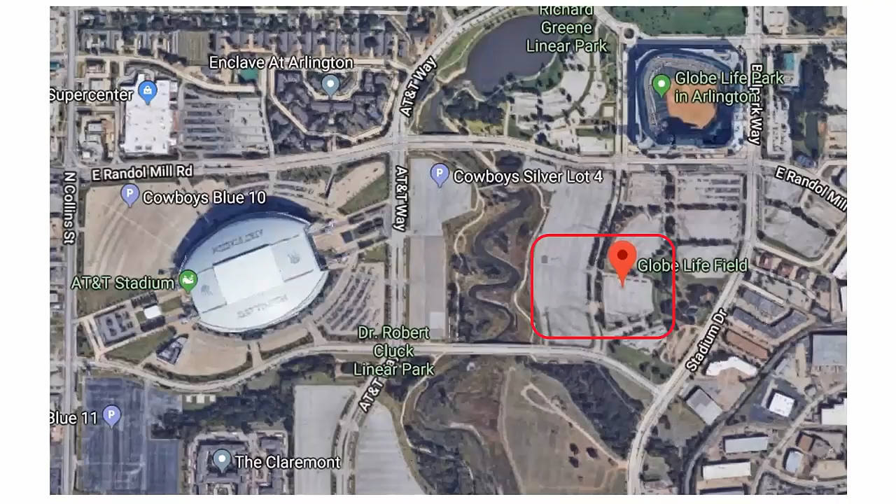Some Globe Life Field metrics. This is a $1.2 billion stadium. It's 1.8 million square feet, which does make it the largest in Major League Baseball. It's on a 13-acre site. It has 43,000 seats, and it is scheduled to open hopefully in July of 2020, albeit without baseball fans present. It has about 90 suites, 10 loge suites, and 13 field level boxes to give various premium offers and various vantage points for those premium areas.

For the project team, this is a joint venture between the Texas Rangers and the City of Arlington. HKS was the architect. Manhattan was the contractor, who will also be presenting some items related to the stadium. And Walter P. Moore was the structural engineer of record. To further go down into the design team, under HKS were 4 associate architects, VLK, VAI, SDS, and EGS. Walter P. Moore is the structural engineer, ME as the MEP engineer, WJHW as the technology consultant, MMA as the civil engineer, Land Tech as the geotechnical engineer, and SWA was the landscape architect.

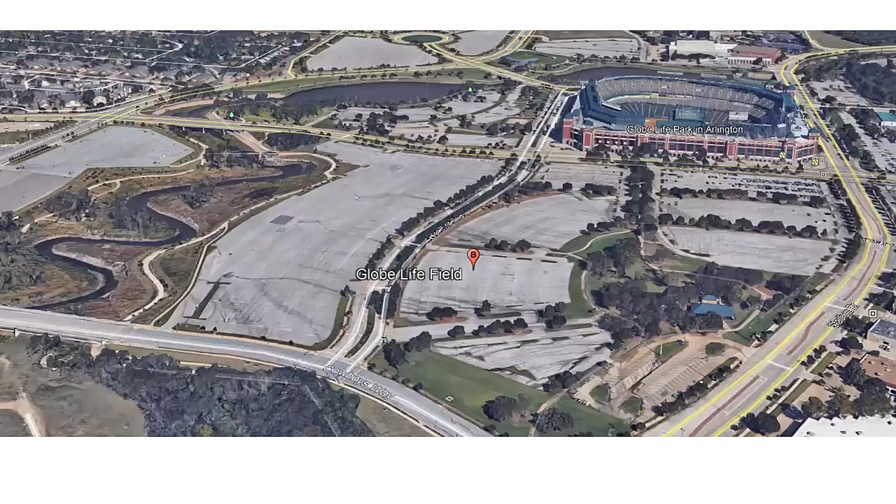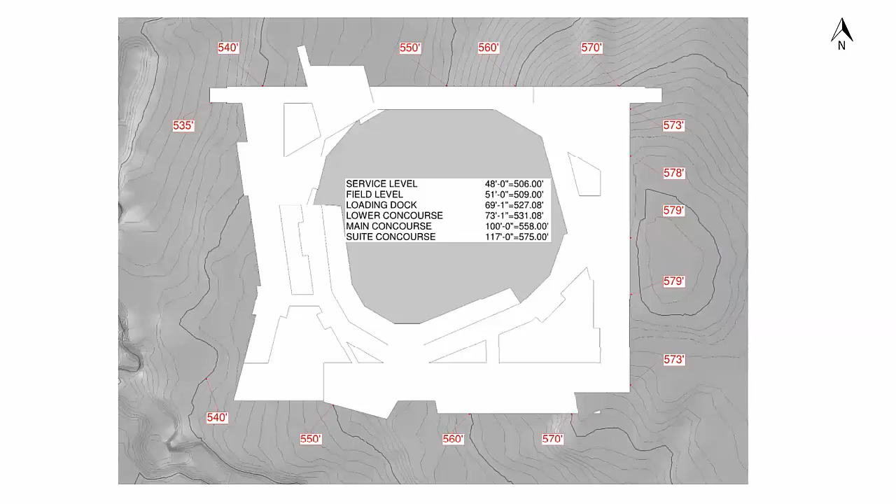So one of the important features we wanted to get into was the site and the permanent retention system. To understand this, we'll look at another view of the site, and once again you can see Globe Life Park right to the north of the site. And here you see Johnson's Creek on the west side of the site. There was an approximate 44-foot drop from the east side down towards Johnson's Creek. You can see that in the site grading here with approximately 579 on the east side and 535 on the low side. And there's even a bit more of a drop as you go down to Johnson's Creek, which is just off the page here. And you can see that the service level is actually down at 506, creating the need for a grade separation of approximately 73 feet.

So there was a unique opportunity to use the site to the advantage. It was done by creating 2 different street levels, 2 different grade levels. On 3 sides, grade was at approximately 558, and you would enter from grade onto the main concourse. At the east side, where the grade is higher, the final grade was also kept higher at 575, and you actually entered in on the suite level. In each case, you would enter into the stadium and actually look down onto the field, which is similar to the existing ballpark. We'll also note that there are some benches here where the excavation stepped out at some of the upper levels, minimizing the amount of square footage on the lower level and creating a need for a stepped excavation.

So, given just the large amount of excavation, there was a need to create a system that did not deliver the large and huge amount of lateral forces from the walls onto the structure. This was done through provision of a soil nail wall.

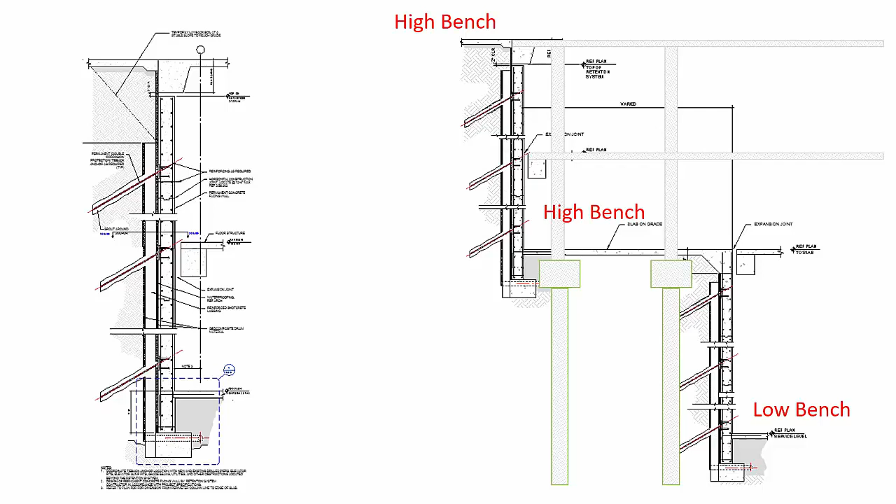So what did it take to build this permanent retention system? It was a whopping 1.3 million cubic yards of soil removed in this excavation, which was about 97,000 truckloads of soil. It was about 253,000 square foot of wall, had a 6 months construction duration, a max height of about 73 feet, and it is the largest soil nail wall in North America.

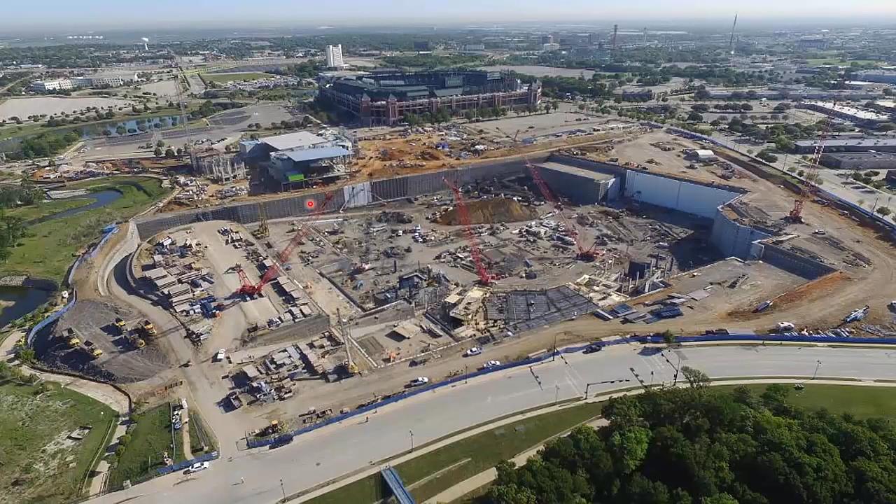And a final view, this shows the excavation mostly complete. You can see the trucks that were being used to haul away the soil. In addition, you'll see the temporary ramp on the far side, which was used to get man and materials down from the street level down onto the field.

This will be a topic of the Manhattan contractor presentation, to discuss some of the coordination items between us, the geotechnical engineer, and the contractor to fill in that temporary ramp. They'll also be talking about other challenges regarding sanitary sewer installation, bore pits, and other water management considerations of this excavation during construction.

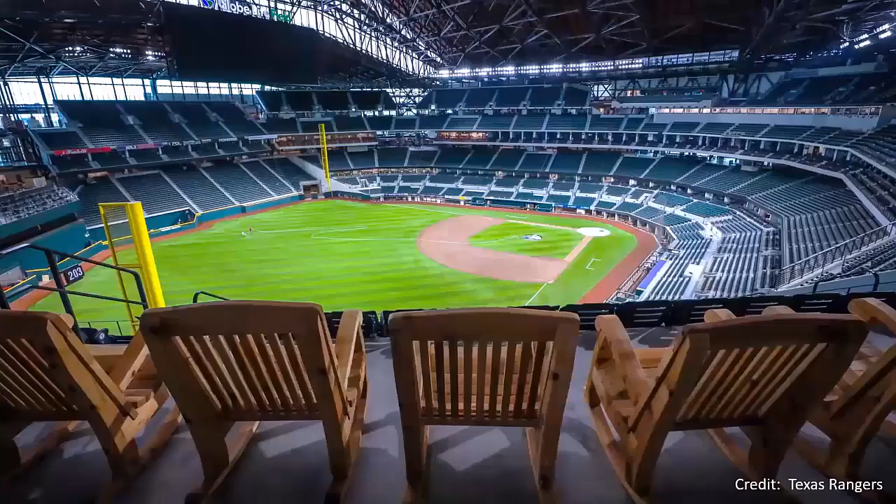Next, we'll focus on the overall building structure and understand what the different components are that go into this building. So the most fundamental being the systems. The lower two levels on this building are actually concrete, primarily comprised of pan-form beam and slab system, while the upper levels are made of steel with a composite floor system. And this was done primarily for construction schedule.

Steel being a long lead item where it takes several months from issuing construction documents till the steel is on site, while concrete is a short lead item. So they can start building the lower concrete portions, and by the time they built those first 2 levels, they would have steel on site and be able to continue the rest of the superstructure with steel, which is a faster construction method, thus saving overall time and schedule.

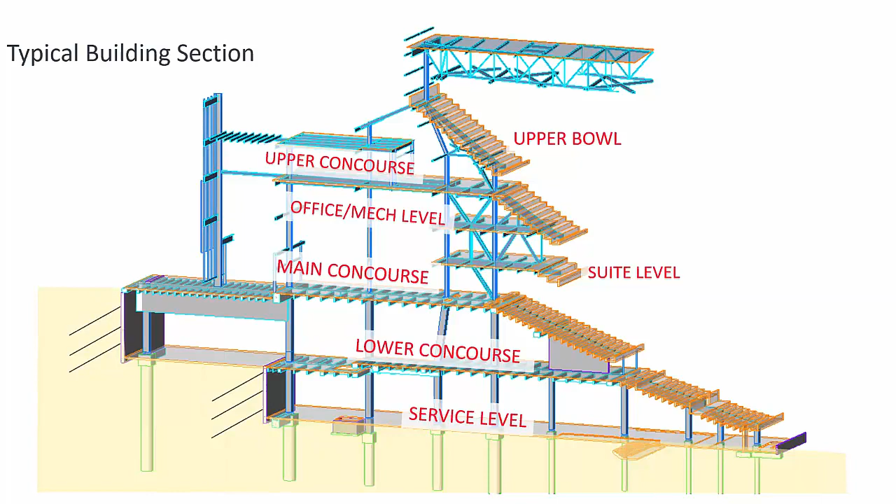For the first 2 levels of concrete, we have a 25-foot floor-to-floor, followed by a 27-foot floor-to-floor, which brings the main concourse up to approximate grade level. Another important consideration of this was the front portion of the bowl, which is actually completely made of precast. So you have precast rakers and precast columns, as well as the precast seating units.

This was done to maximize the laydown area to help with the construction logistics. So this area can be left out during construction of a majority of the ballpark, and since it can be erected very quickly, it can come in at a much later date and be installed after the contractor is able to remove a lot of the laydown area that they had.

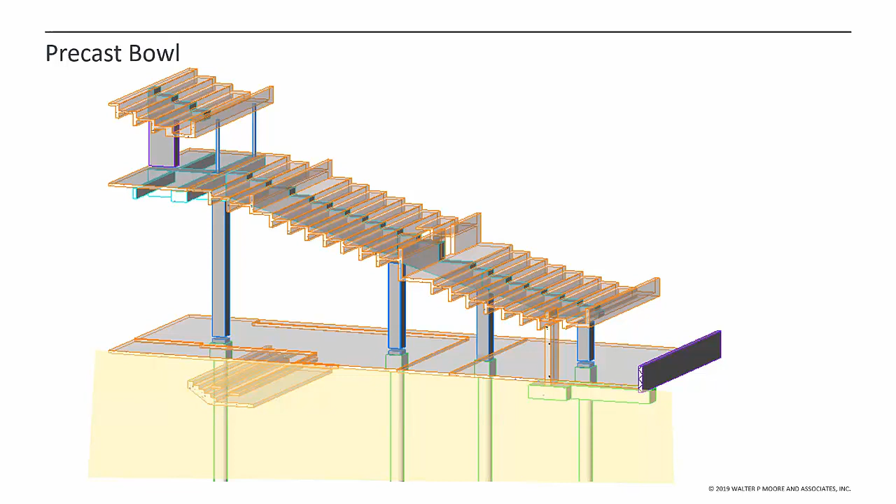Next, I want to talk about a couple opposing design considerations for the structural layout. The first being what we call the street. So what is shown in yellow is a concourse area at the main concourse, and it is directly below this sloping roof, which is primarily comprised of ETFE, which is a transparent membrane that allows sun to shine down onto this area. Given the width they wanted for this street, it required that the column be inset here, which set this column, which then required a cantilever at the back of the bowl.

What they were trying to create here is a very wide area, in which case there were concessions and restrooms on the left and a ballpark on the right to mimic kind of a street environment, similar to what you might see in Fenway Park.

At the same time, at the service level, there needed to be a service corridor that provides a fire lane as well as a corridor for various utilities and operations circulation, which set the location of this column here. And what resulted is the need for a sloping column between those 2 columns here. And we also have shear walls on that grid, which then created a need for sloping shear walls as well.

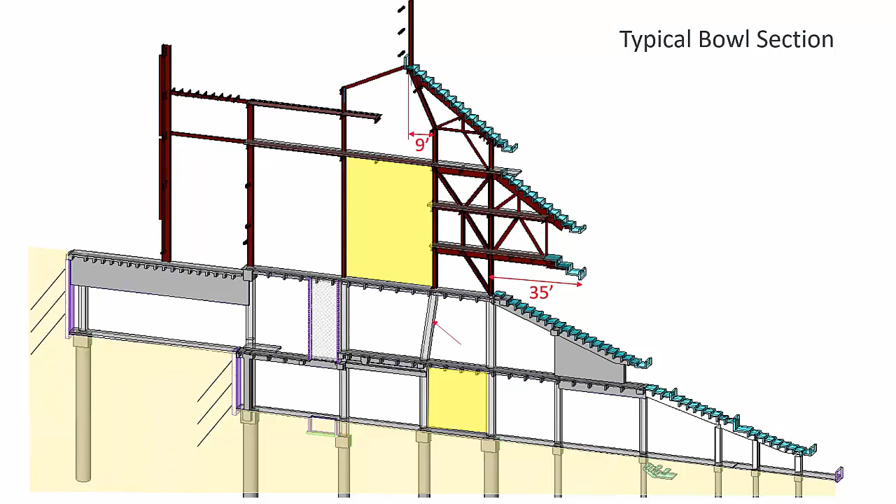In order to get the seating bowl as close to the field as possible, we had a 35-foot cantilever, which was accomplished through the provision of a 2-story deep truss. The back truss had about a 9 feet cantilever, but had a large depth of approximately 20 feet.

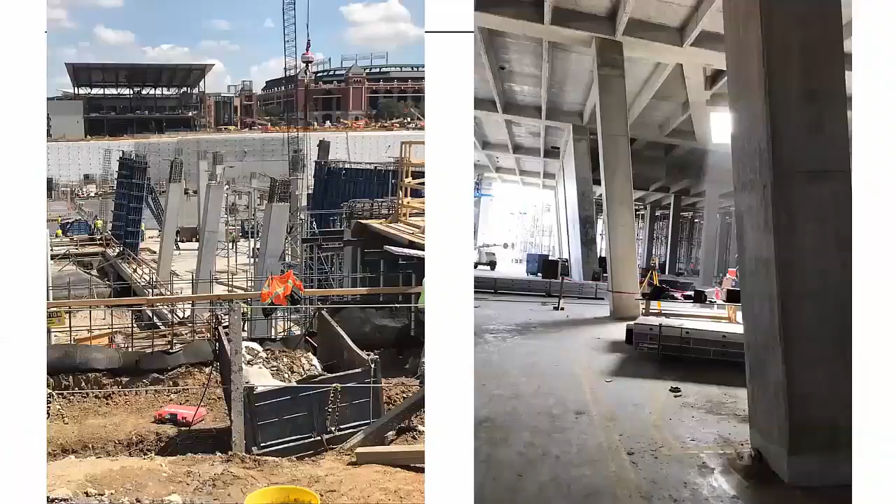Here's a picture of that sloping grid we talked about. And you can see here the workers are actually forming one of those sloping shear walls in this picture. And here's a couple final pictures of this shear wall in a formed condition. Along with this is a good picture of that sloping shear wall and column grid in the final condition.

We also see here a view of the steel and some of the precast pre-stressed seating units installed and at the various stages of construction. You might also notice these columns have these little corbels attached to them, and those are for where the precast beams can come and be erected and sit on those corbels.

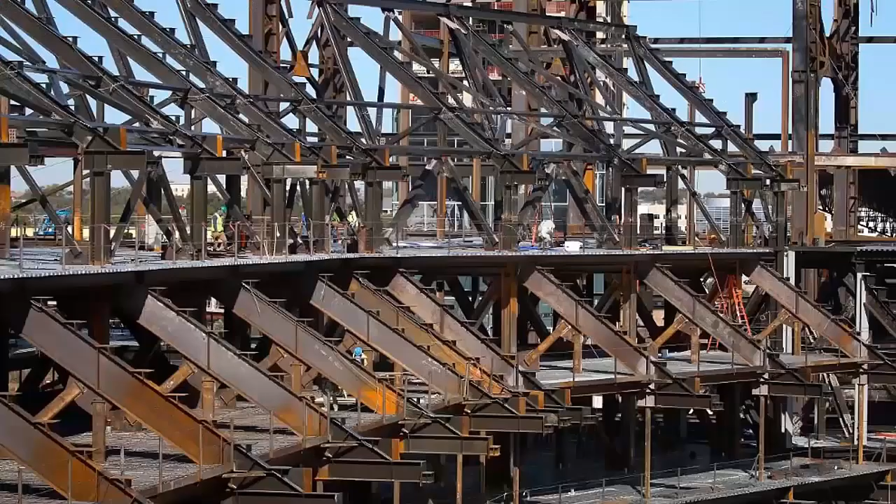So you can just see the precast area resides in about this area. You can see the amount of extra laydown area the contractor was able to achieve through coordinating this precast system down low. And this is yet another view that just represents the complexity of the steel raker system needed to support the seating bowl.

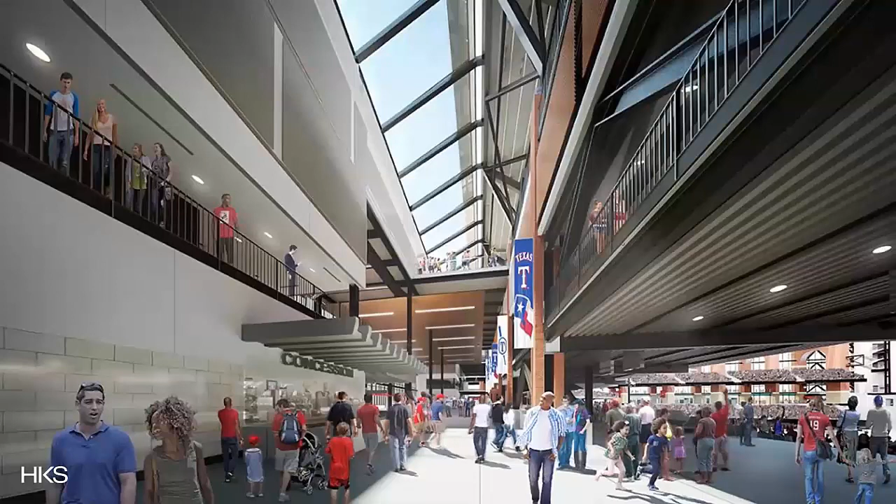This is a rendering of the street that we had discussed, and we do not have any professional photography yet on this project, since we haven't been able to get them out there due to COVID concerns, but it does give a good representation of what they're trying to achieve. You can see the skylight element provided by the ETFE up top, and the field is over here to the right with concessions on the left.

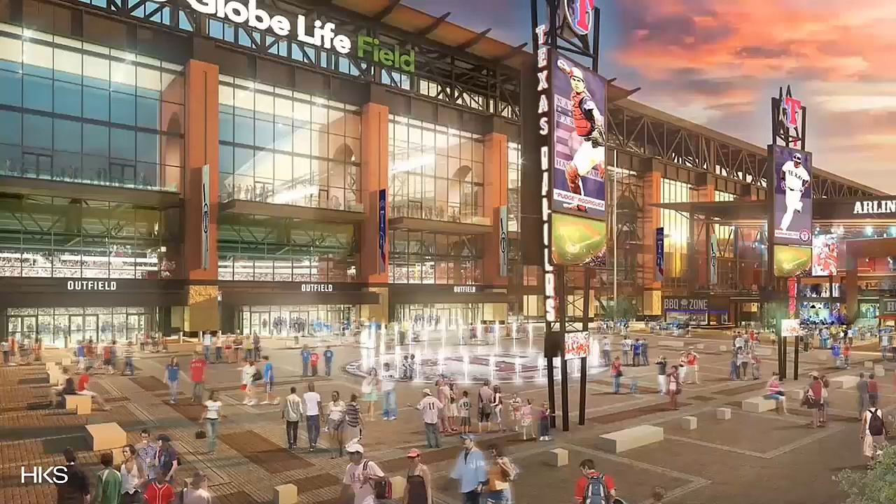This features a concert venue, which is nestled right here just to the north of the stadium, as well as several shops and eateries. The north wall here is featured by large expanses of transparent curtain wall, and approximately every 60 feet you'll see these bents that incorporate the arches, which are an homage to the existing ballpark arches as well. And while these have an important architectural feature, they also have a very important structural role as well, in that they support the rail truss for the retractable roof.

And here you can see another version. So what we want to do is first focus on the steel levels of this area. So you can see that there's a rail truss right here, and the retractable roof actually rides on a rail that sits directly above this leg, and then through the provision of a box truss, this all goes down to a truss structure down below that then takes all the load into the below structure and into the ground.

That structure is about 100 foot tall. It has 16 feet deep cross trusses, which are 30 foot deep at the end. And in the middle, you can actually see an inverted home plate area that we created. That's actually to route a large, several feet MEP duct that brings the cold air and circulates the air into the ballpark.

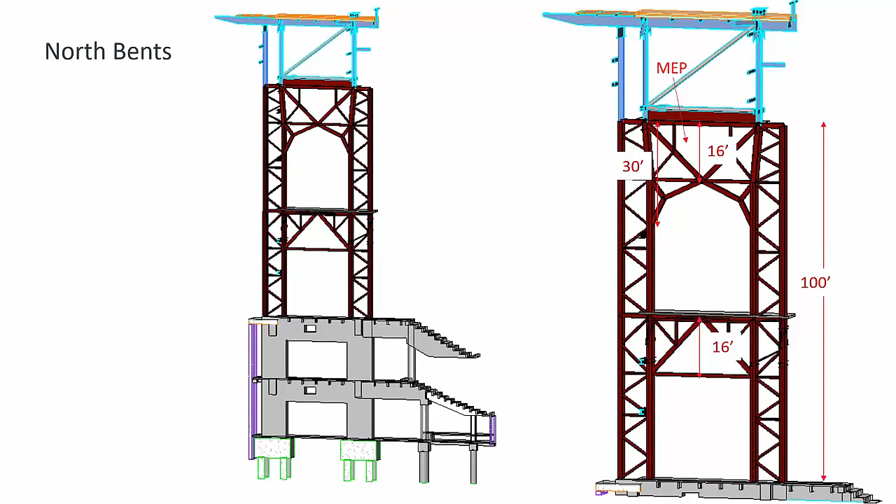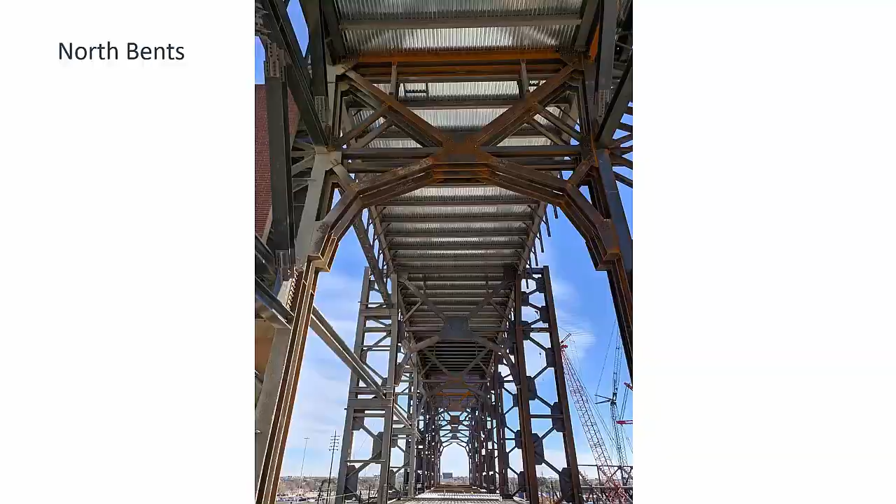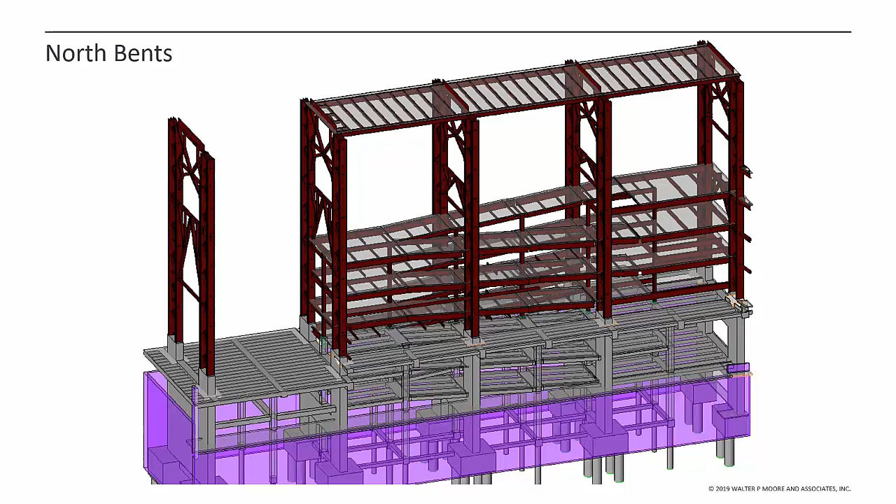Another important consideration at the north bents was the integration of the ramping system needed for patron circulation. So you can see here, this ramping system actually transitions through the bents in various manners depending on what level you were at, resulting in the need for various configurations of these north bents depending on where you were on the ramping system.

And while this was a very important design consideration given the different stiffnesses and strengths of each one of these different trussed elements, it also had some coordination needed with the contractor below for them to help set their jointing needed with their construction sequence, which was a large coordination item between us and the contractor that I believe they will also cover in their presentation.

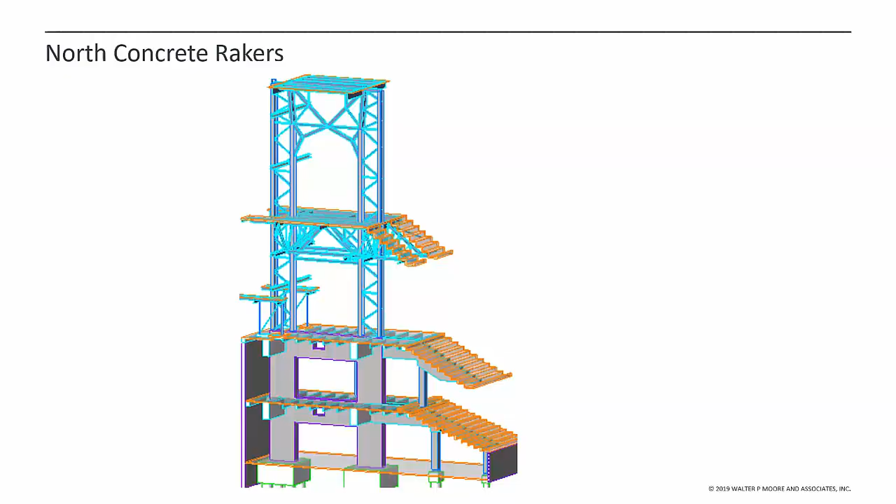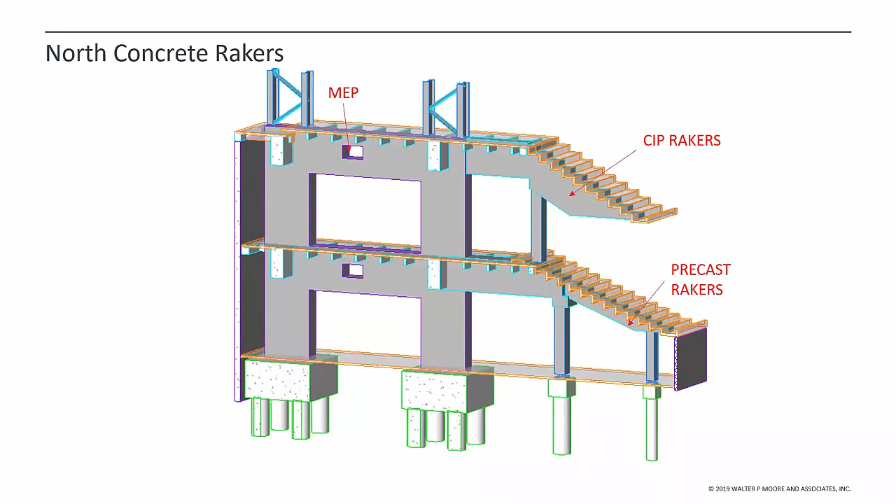We have approximately a 30-foot cantilever at this location with a 12-foot 6 deep raker and an 8-foot deep backspan, approximately 15 feet deep at the link beams and 16 feet deep at the legs, which then reside on an 18 by 18 by 8 foot 6 deep cap set on four 48-inch piers.

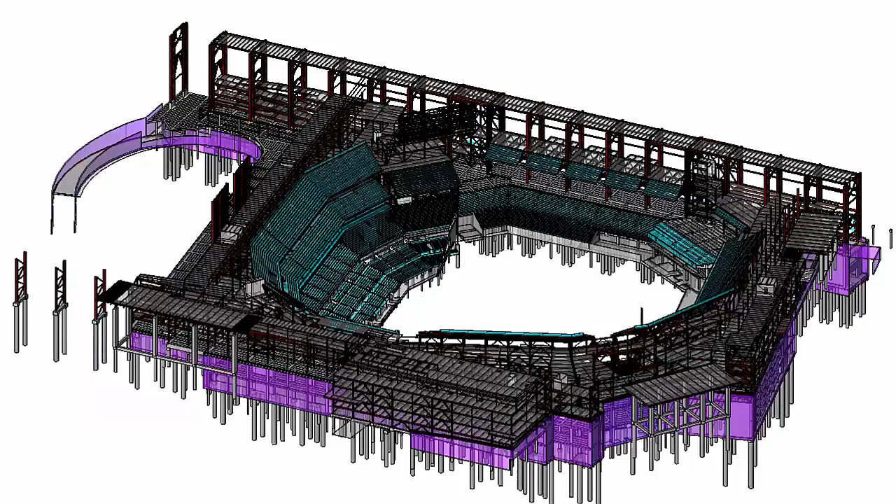So what did it take to provide this building structure? It was approximately 10,000 steel beams, 850 piers, 750 columns. There was about 10,000 cubic yards of concrete in the lower concourse, which is about enough to fill 3 Olympic-sized pools, 6,600 cubic yards of concrete in the columns, and about 70% of the seats are between foul poles, giving most of the seats excellent vantage points to the field.

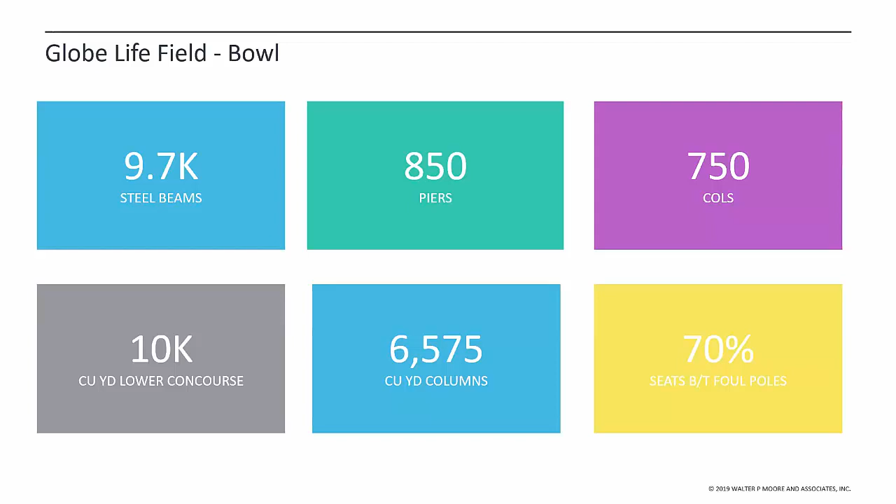For the bowl steel alone, there was 16,000 tons of steel needed. The structure sits about 100 foot above grade. There were 12 cranes needed to erect the bowl items alone, and the footprint of the stadium was approximately a little over 800 by 1,000 feet.

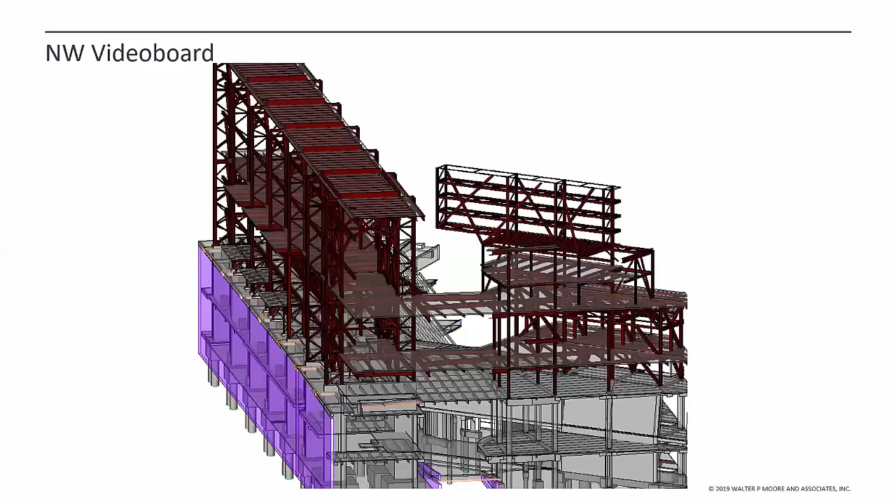First of all, the board was 110 feet wide by 42 foot deep, and it did have a 45-foot cantilever at the end with a 30-foot backspan. And of course, to achieve this cantilever, you have to resolve the vertical loads needed, but you also have to resolve those lateral loads, that horizontal wind sail effect that you get from the wind loading.

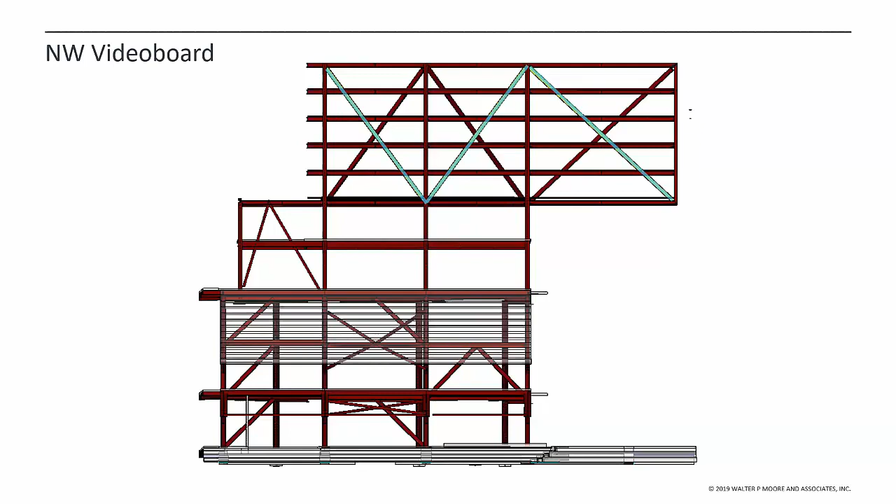First, to resolve the vertical loads, we provided this blue in-plane truss needed for that vertical cantilever resistance. But we know we also had to resolve that out-of-plane load as well. To do that, we first provided the out-of-plane braces in yellow, shown here, that help resolve that load down into a horizontal truss in green here, that then can take it down into the vertical lateral load resisting system.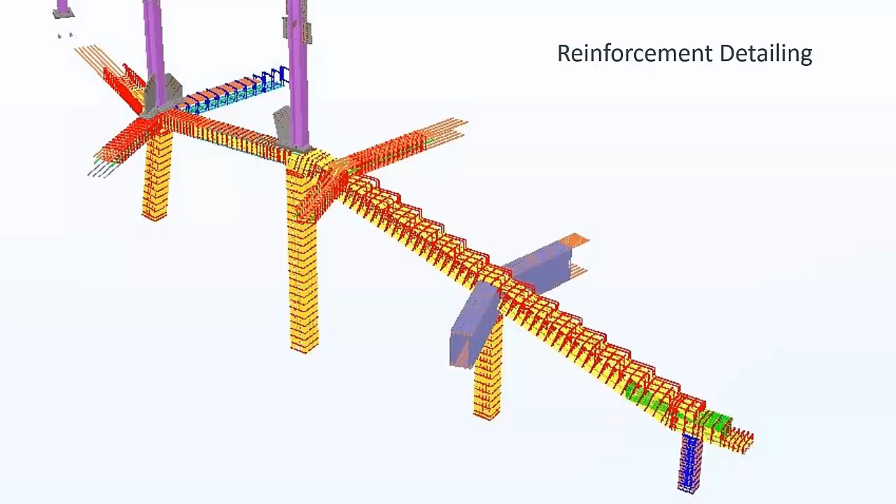Additionally, on the north part of the building, not only did we model it, we also provided shop drawings and bar release files to the fabricator. So here we can see a condition where we have these north bents that we were talking about that support all the vertical and lateral loading of the roof, and they're coming down on these concrete elements, which then take the load down to the ground. In this case, we have the very large vertical and horizontal elements. We also have a horizontal return shear wall here as well.

So once again, for this process, we would model all the rebar, ties, and vertical steel needed in all these elements. We would coordinate them with all these anchor rods you see here and get those bar spacings where they needed to be. We then create the 2D shop drawing as well. So in the field, they would have both the 3D and the 2D shop drawing. And finally, we would actually take those and provide the bar release files directly to the fabricator so they could fabricate off of them.

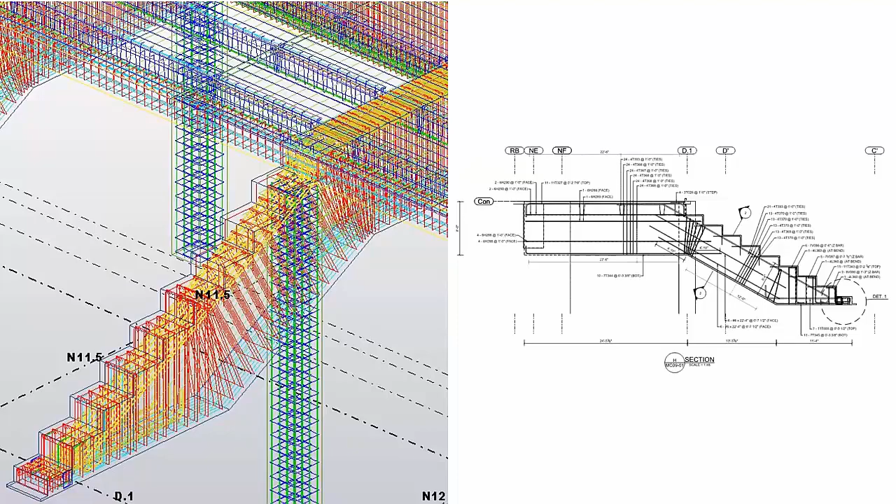So once again, we modeled this and coordinated this. The contractor is able to use it to help place their reinforcement effectively and get the anchor rods coordinated with those locations. We also knew that this was a very important area that we just couldn't mess up because the fix would be very difficult.

So from that standpoint, these intricate templates were actually also built by the contractor as just a temporary way to get the anchor rods in the correct location and keep them in the correct location during concrete placement. And through this collaboration, we can actually say that none of the anchor rods at the north bents were mislocated at all, creating a very efficient and fast construction of those elements without any issues. You can also see another view of the north bent steel here as well.

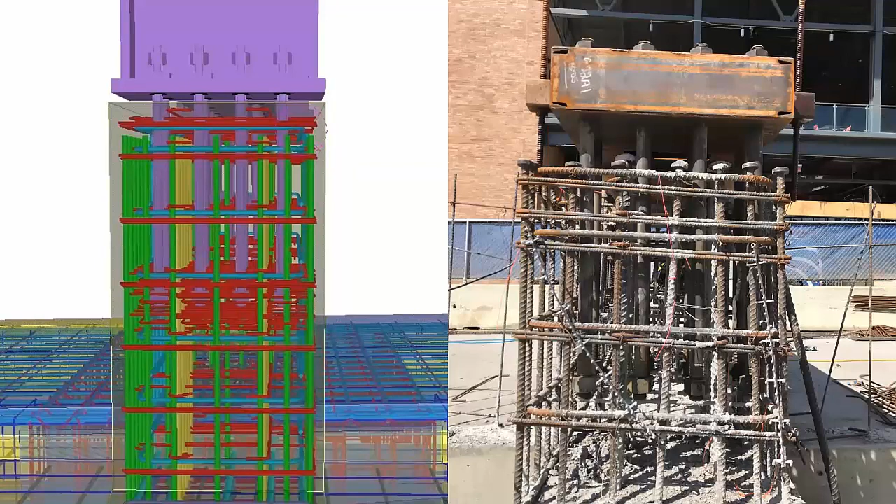So what are we trying to accomplish with this model-based delivery? So we've shown that we can model the rebar, including the hooks and terminators and the reinforcement columns and any beam MEP penetrations. We can also coordinate those with anchor rods, bent base plates, and any of the other special conditions that are needed. And what we're trying to do here is we want to solve the problems virtually before those problems in the field arise, which eventually happen on every job. And we want to figure it out virtually.

It positions the team to make better decisions when confronted with those discrepancies and helps reduce the risks and project schedules. By us modeling the rebar, creating the shop drawings directly from that rebar, providing the bar release files directly to the fabricator, we're able to remove the silos that often are created in that concrete design and review process that helps us protect project schedule, reduce risk, and provide more quantity certainty to all parties.

With that, we will turn over the control to the next portion for the roof portion of the presentation. Thank you very much.

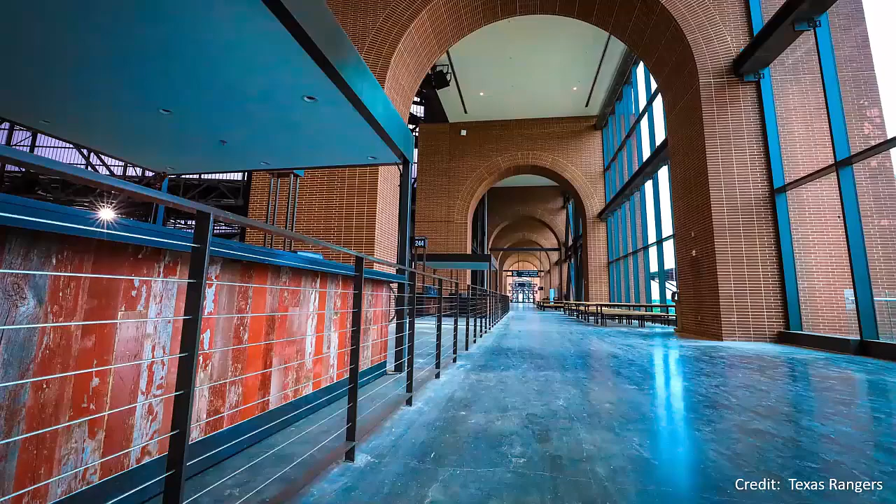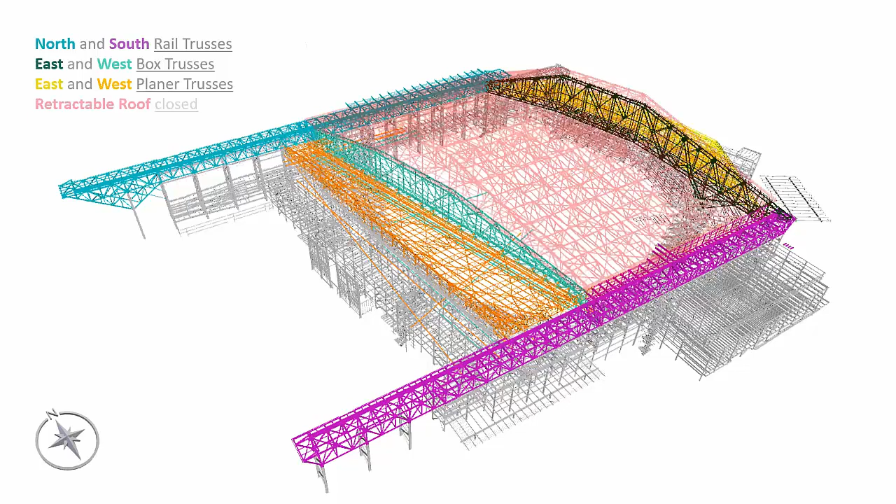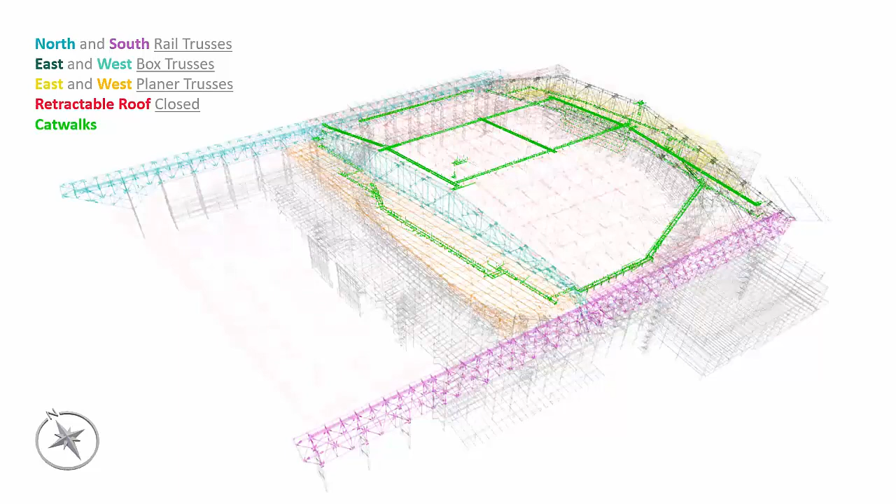And then you've got the operable roof that sits on top of the west roof and then kind of comes to the side of the east roof. And this is the closed position. And then you have a series of catwalks within both fixed roofs and the operable roofs that also have access to each other. And then finally, you see the roof at its open position.

So the roof, as far as the dimensions go, the north rail truss is 938 foot long. The south rail truss is 945 foot long. The span from rail to rail, and this is the span of the operable roof as well as the span of the fixed trusses, is 642 feet. The operable roof is 416 feet wide. And then it takes about 10 minutes or so for it to move depending on the wind, and then about 2 minutes or so for the seal compression. So the whole process takes about 12 minutes to move the entire operable roof about 405 feet.

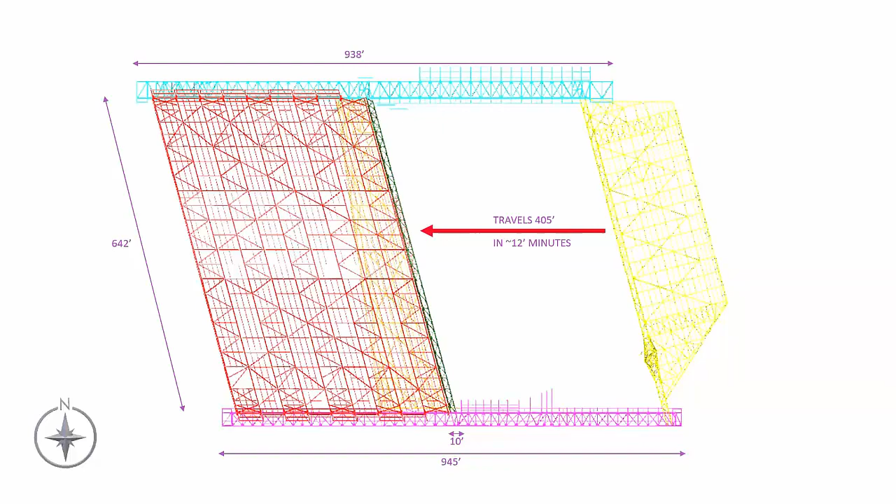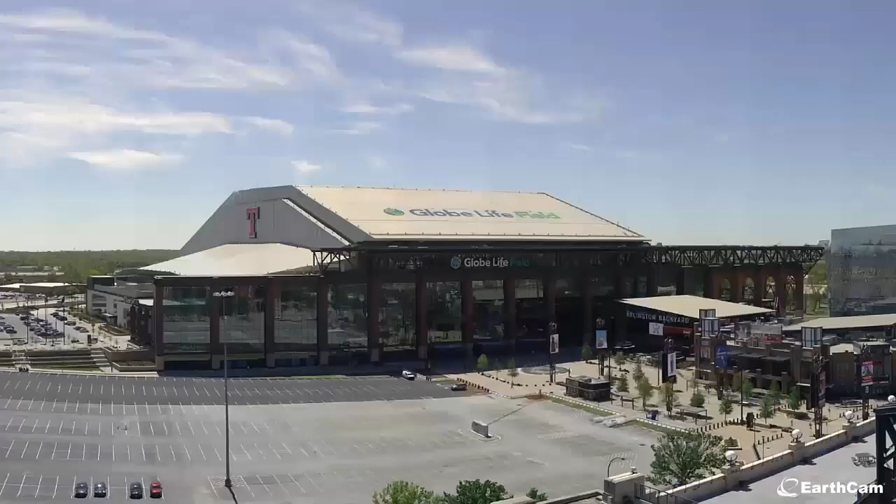And here's a picture of the final condition, built at the closed position. Another view of the structure from the outside with the roof closed. And this is, again, one of the renderings from HKS. And then this is another condition with the roof open. It's really cool how it creates this little shaded area here that potentially could be used for some other things. And here is one of the live cams that Manhattan had that shows you at the final stage how it looked at its open position.

So tonnage-wise, the east roof had 2,600 tons of steel, the west roof 2,000 tons of steel. The north and south rail trusses combined had 4,400 tons of steel, and the retractable roof had 10,000 tons of steel. So that's a total of 19,000 tons of steel, which is a little more than 2 times what you had in the Eiffel Tower as a comparison.

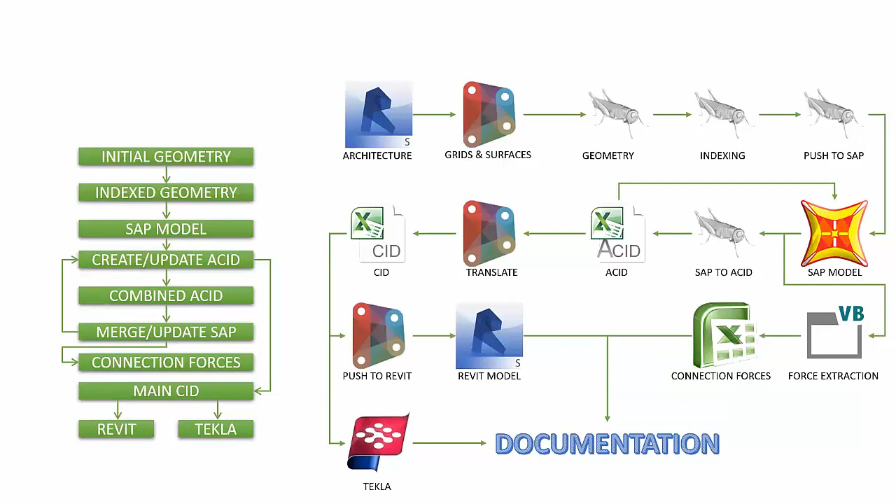So we're not going to get too much into modeling and analysis due to time, but just know that the whole thing was parametrically modeled to meet the constant change that was happening during the design phase, and also to meet the schedule. So we needed to parametrically model the whole thing to match the surface that HKS was providing to us during design. As it was changing, the trusses and the model would adapt to it.

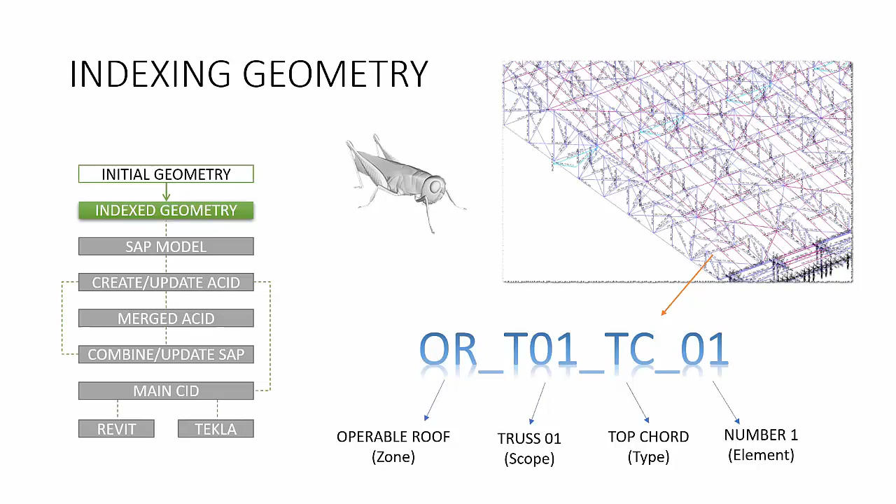And the other thing to point out that was extremely useful is naming everything, which internally we call indexing. This indexing ended up in the drawings to point out connection forces and also connection concepts and sizes, etc. So this was very useful, and this was all done parametrically, so we didn't sit there and name each one of these elements, but we would be able to know exactly what element was where just based on its name.

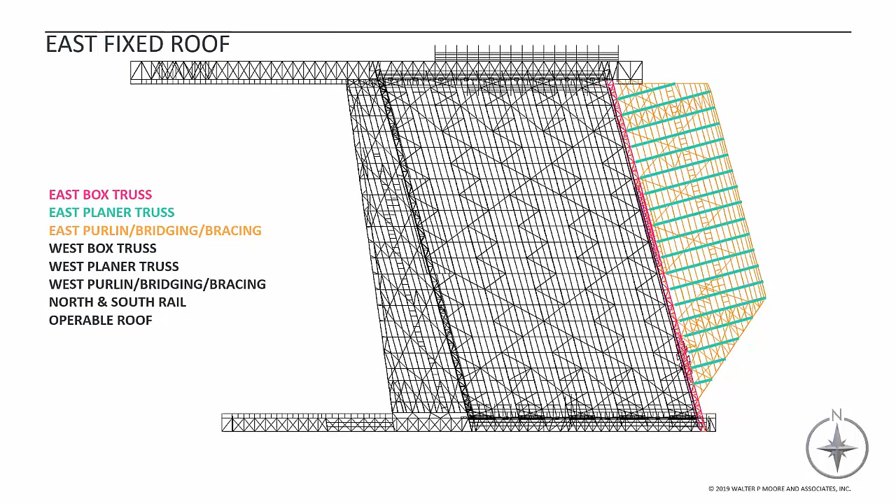So we'll move on from that part of the discussion, and let's take a closer look at the structure itself. You've got the east box truss. The east box truss has 19 planar trusses that frame into it, and in orange you'll see the purlins and bridging and bracing that come in between. The east fixed truss spans on the south end, which is to the bottom of your screen, to a truss structure that during design we called the colossal column, and everyone started calling it the colossal column, which I'm okay with.

So that's around a 125 foot span, and from there on to the north box truss, it's 517 feet. At each end, on the south and north, you've got the knuckles. That's where the connection happens from the fixed roof to the north truss and south truss. The planar trusses span on one end to the bowl framing, and on the other end to the box trusses. You will also notice that on the east side, we had 2 columns that the roof spans to. On the back end, we released the connection to not allow this back support to act as a backspan.

The other thing you'll notice is that there is quite a bit of depth here, and most of that is architectural. That 75-foot deep member also wants to roll due to wind and other phenomena. So the planar trusses essentially act as roll beams to prevent it from rolling over.

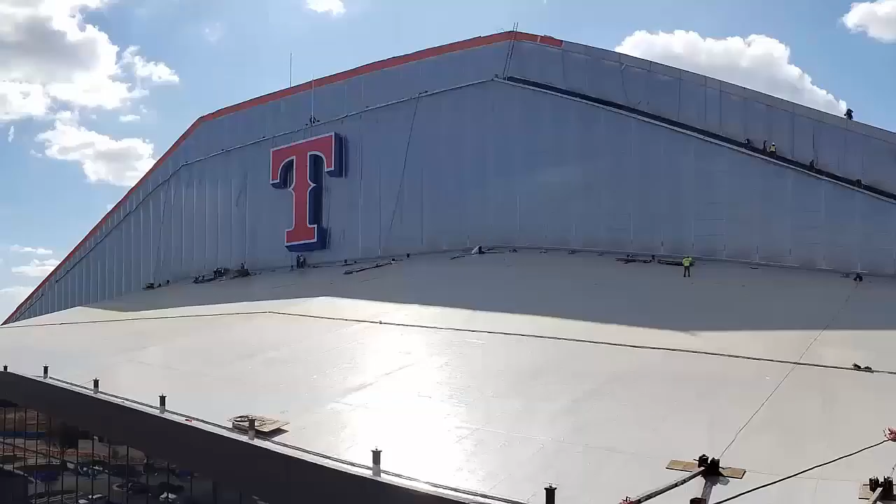Here's a more completed picture. As you can see, all the planar trusses, bridging and bracing are in place, framing into the box truss on the east side. And here is the final condition where you can also see the ETFE panels as well as the Texas Rangers sign. From the inside, you can see the scoreboard, which, I don't think I mentioned, is 152 feet wide and 58 feet tall.

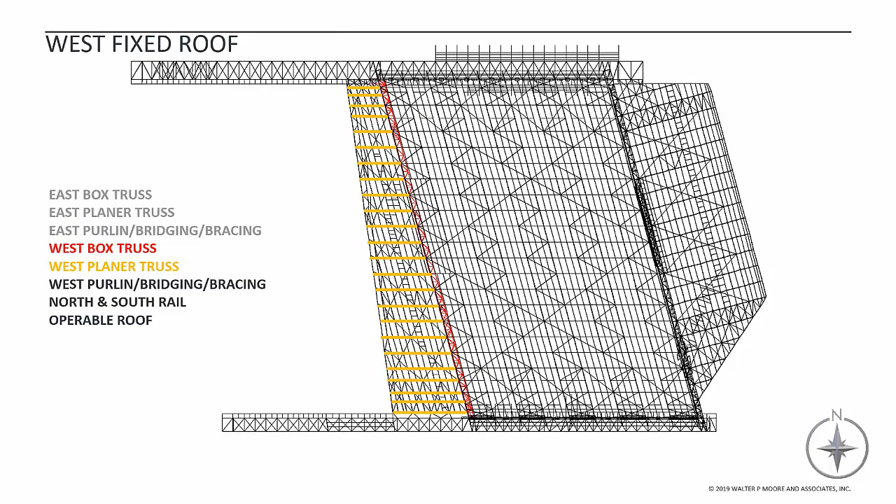On the west side, in a similar manner, you have the box truss that spans, on this end, fully from north to south. And we've got 24 planar trusses with 30-foot spacing, and then the bridging and bracing in between them. So that, again, is a 642-foot span. It's 61.5 foot deep, which is shallower than the east roof. This is mostly structural. It's not so much architectural.

One of the cool architectural features that it was able to achieve is that the designers from HKS wanted it so that when you look from the bottom, you think these planar trusses, spanning 55 foot to 127 feet depending on where they are, look like cantilevers, because you can't see the box truss when you're sitting below. But in reality, they're spanning to a box truss that's spanning from rail to rail.

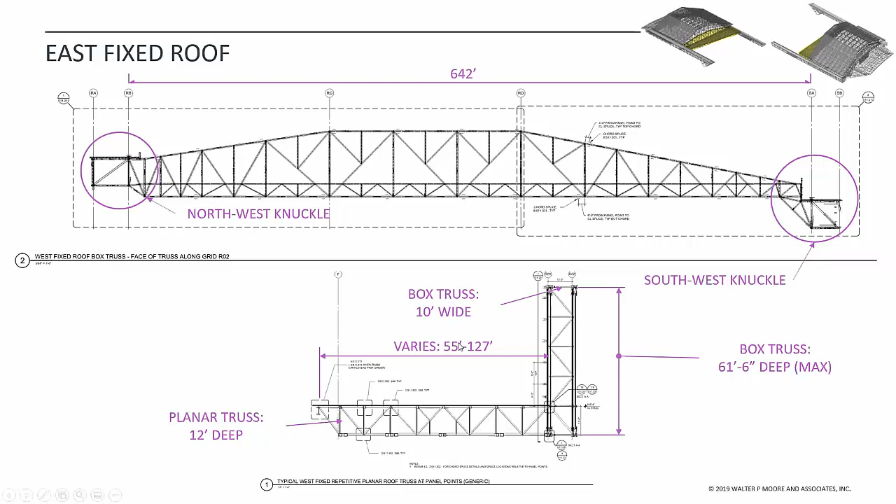So the rails, on the north side, as discussed before, are 938 foot, and at the end you also have a 100-foot cantilever, which was an interesting design challenge. And these trusses had to be extremely stiff because you have an operable roof rolling over them with the load coming from the operable roof. And the trusses sit on the bowl structure, so the geometry of these box trusses had to be determined also based on what kind of support we had below.

Jeff talked about the north end. Specifically, they sit on these bends, and the design of the bend and its stiffness was challenging. On the south end, it's mostly the bowl structure on columns that they come up on. And towards the west side you also have three bays of bends that are similarly constructed. You've got 4 knuckles where the fixed roofs come in.

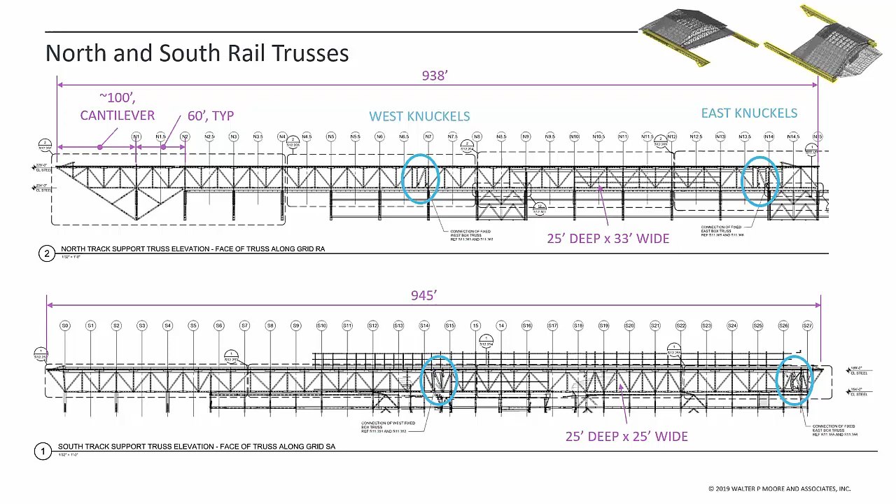The north end, both sides actually, are 25 feet deep. Typically on the north side, they're 33 foot wide. On the south end, the typical bay is about 25. And depending on where we landed on the column, we had to modify that. Here's a picture of one of the knuckles that gives you a sense of the scale and complexity of these connections. This is on the northwest side where the west fixed roof comes in.

And here's a cross section from the drawings, and you'll notice there's a 15-foot drop from the north side, shown on the left, to the south side. That had to do with a shape that HKS was trying to achieve, and on top of that, we had this 20-foot tall 4-bar linkage that we'll talk about in a little bit, and the reason it existed.

As far as the rails themselves go, we had these rail girder assemblies. Essentially, it was plate built-up construction sitting on top of W36s. This was for both gravity and the lateral loads coming from the operable roof to be received and transferred to the box trusses. The rail girders were 37-inch sitting on W36s, so they provided the stiffness we needed to control the deflection and vibration for the operable roof to be operational.

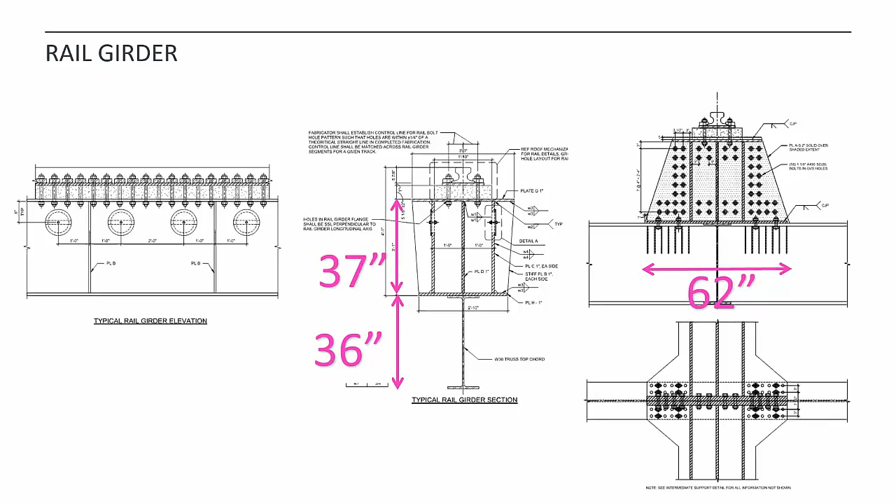One other thing that's cool about the rails is that it's using an A150 crane rail, which is the second largest produced, at about 100 pounds per foot. And there's about 1,800 foot or so of rail length total used on the job. So that's another interesting fact. Here's a picture of the north rail being constructed, and you can see the scale of that 100-foot cantilever with its 60-foot backspan.

And here's a picture of the south rail once it was mostly completed. Another picture of the north rail. You can see the scoreboard that Jeff discussed earlier in the picture here. Also, you'll see the bends that the north rail spans in between.

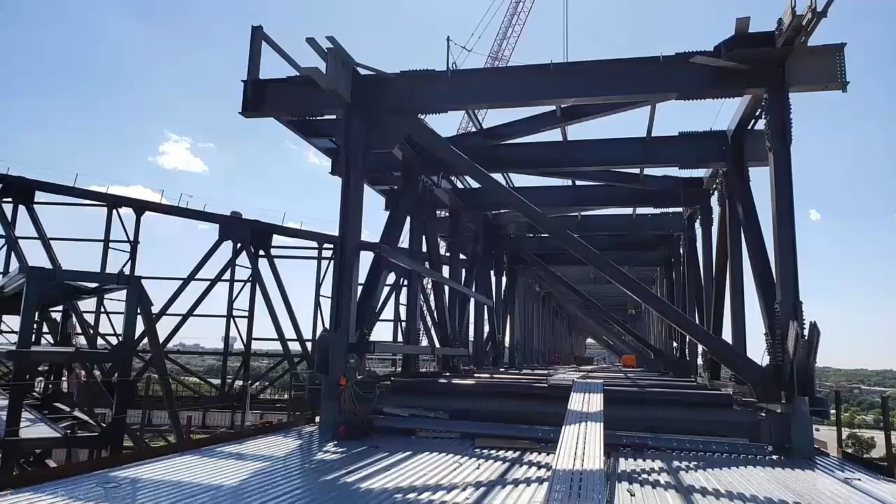And a cross-sectional look. This is on the south end, and north end similarly. We have these really wide platforms. Obviously, a portion of that will be taken by the feed rail, but essentially provides room for Uni-Systems to be able to maintain this system. Essentially provides them enough clearance to drive their carts in this space.

Here's a picture of the rail girder assembly. You see these holes. These are access holes to be able to reach to the bolts and adjust the rail as needed. The rails are interesting because they're essentially the same thing that you would see in a normal train rail. So they use a process called thermite welding to weld the pieces of rail that come in, and they essentially grind them smooth so you won't be able to tell, so that the wheels as they travel over this won't experience any difficulties.

And the operable roof spans 642 feet rail to rail. At its deepest points it is 65 feet deep, and it kind of narrows down to 59 feet deep. The clearance from the field is 209 feet. And that was based on the study that HKS performed to make sure that the ball projection doesn't hit the roof.

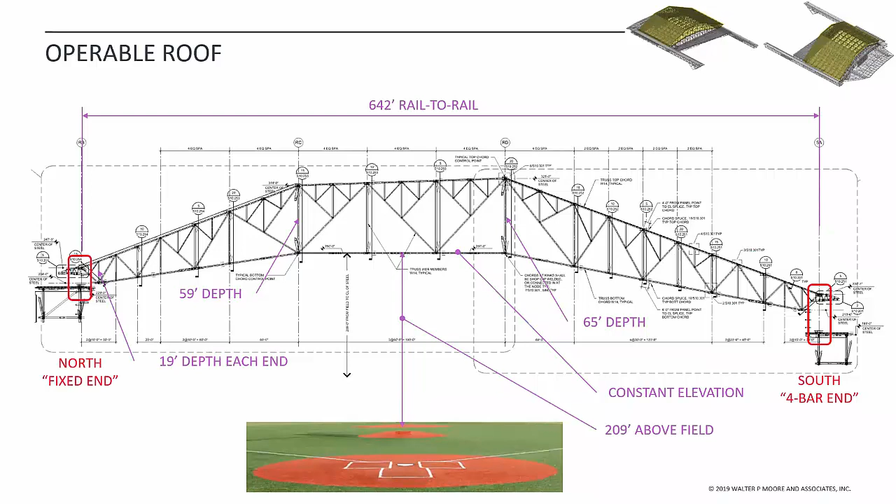And then you also see the 4-bar system on the south end, which allows for the movement. The importance of the 4-bar is the fact that, if you look at it in this picture, it allows for up to 24 inches of movement. This reduces the amount of stresses that get transferred from the operable roof down to the bowl system and the rail trusses significantly, whether it's wind blowing on it or it's temperature. And these systems sit directly on top of the rail girder systems.

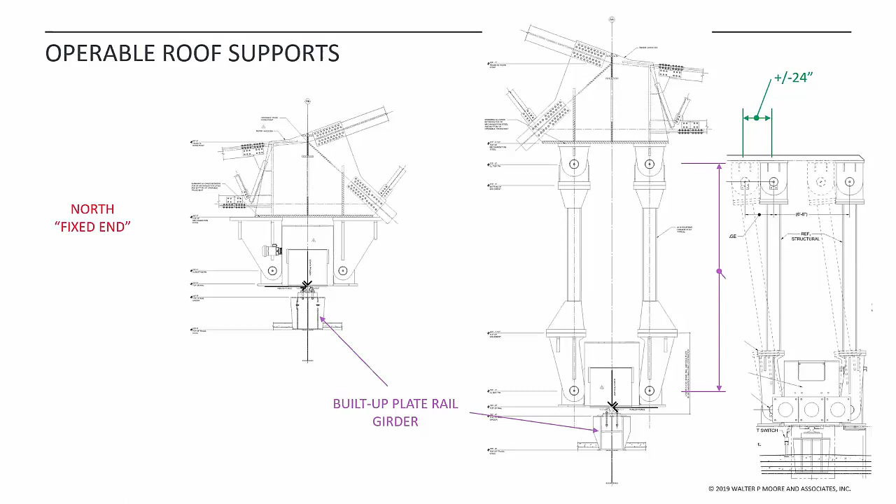So as far as the mechanizations go, we've got 10 driven bogies, 6 of which also have a clamping mechanism. And the remainder are idlers, they're just wheels that get pushed. So on the south end, again, this is where we have the 4-bar system, and you have the two-way ball bearing system to allow for movement in both directions. And the reason they're both ways is because of that 15-degree angle. On the north side is essentially our fixed side. That's the side that doesn't move.

And you can also see the bogies. Each bogie has 6 wheels. The bogies are a traction system, essentially similar to your car: you've got the engine that moves a smaller gear, and that small gear moves the bigger gear, which is connected to the wheel, and then it rotates that, and that friction between the wheel and the rail is what's causing it to move.

For each one of these, we've got the static load and operating load. The static load is around 21,000 kips, and under operating wind, which is around 40 miles per hour, it is around 1,700 kips on each bogie. There are a total of 120 wheels, and each wheel is around 36 inches in diameter. The motors are 10 horsepower, and the total roof is around 800,000 foot-pounds of torque.

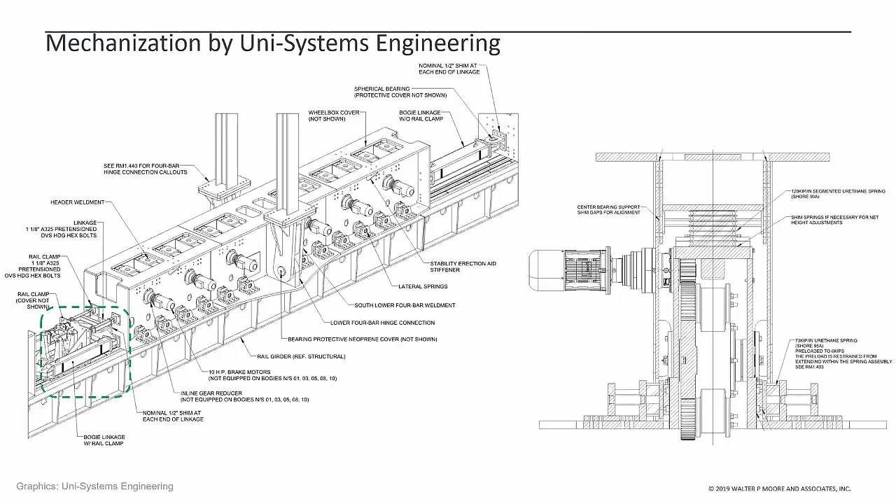Also on the left side, you see this clamping mechanism, which is also pretty cool because it's connected to the electricity, and it has this magnetic system so that in case the power goes off in the middle of the move, the clamps engage because the magnet is no longer engaged. It's an electromagnet, and when that's gone, it clamps back and brings the whole roof to a stop, which is considered the emergency stop, which we'll talk about in a little bit. It causes this roof quake behavior because about 5% of the weight of the roof now wants to act laterally.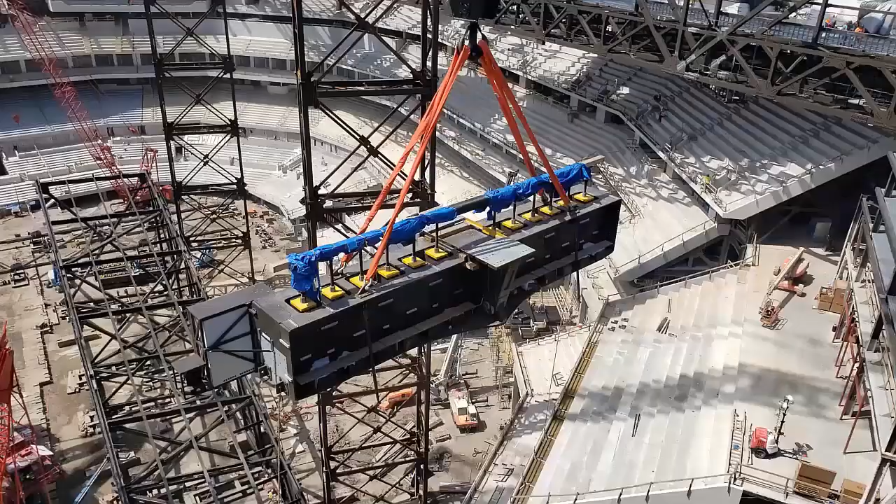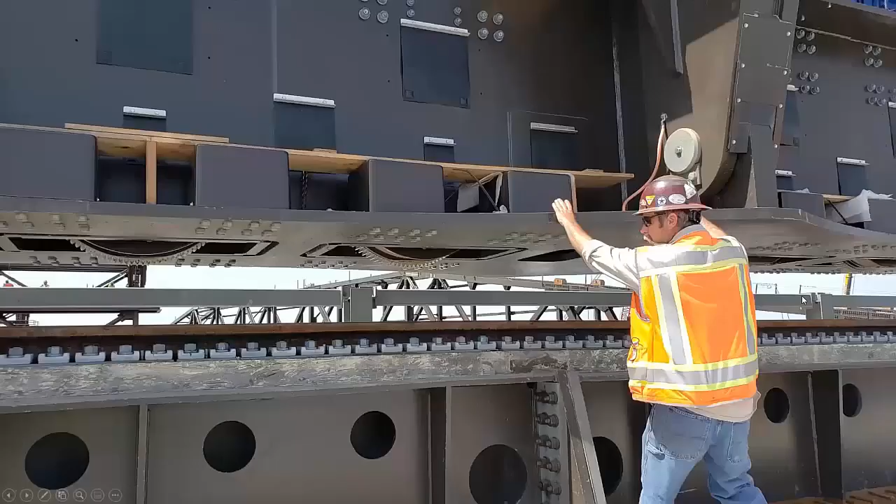Then it got lifted up with the crane and was brought down to be placed on top of the rails. And you can see on this one, you also have the bumpers being connected at the end. This is what the process looked like as you were bringing it down very slowly to make sure that all the wheels connect to the rails.

You can see there are these rods being installed, because what's also interesting about the 4-bar system is that the whole roof is erected in a cambered position, and then when you release the roof and decenter it from the shoring tower, it goes back to essentially a 90-degree position, as it was intended. So these rods allow you to control that rotation at each bogie for its cambered position before it receives the operable roof.

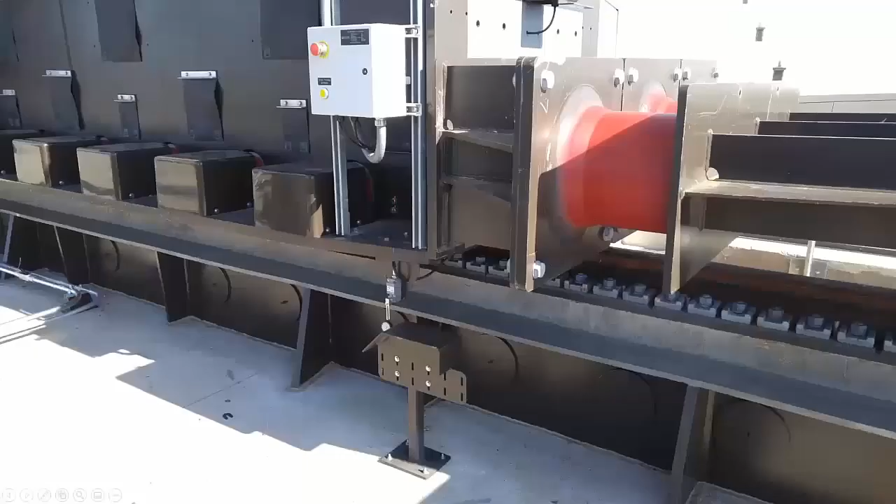And here in this picture on the right side is a more completed stage. You can see the feed rails that carry the electricity that comes from the grid. In this picture, you can see the big red button that engages the whole e-stop mechanism, the emergency stop mechanism. So if the power goes off or you hit this button, both of those bring the structure to a stop. And if that doesn't work, we also have these bumpers that come to this structure that connects to the rail. Hopefully that doesn't happen, but it's designed so that the roof doesn't slide off the side of the building. But both of these create a large level of force that the structure had to take.

On the top of these units, you also see these little cabinet areas. These cabinets on the right include these wheel box assemblies. And on the top, you can also see the springs we were talking about earlier that slide down. There are cranes installed on top of the roof, so you can move the roof and park it where these cranes are, and then lift up one of these wheel boxes as they need to be maintained and changed.

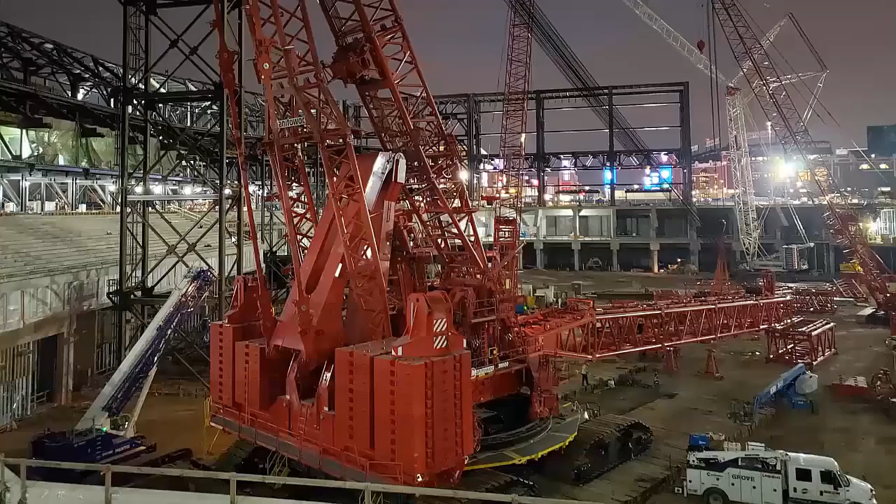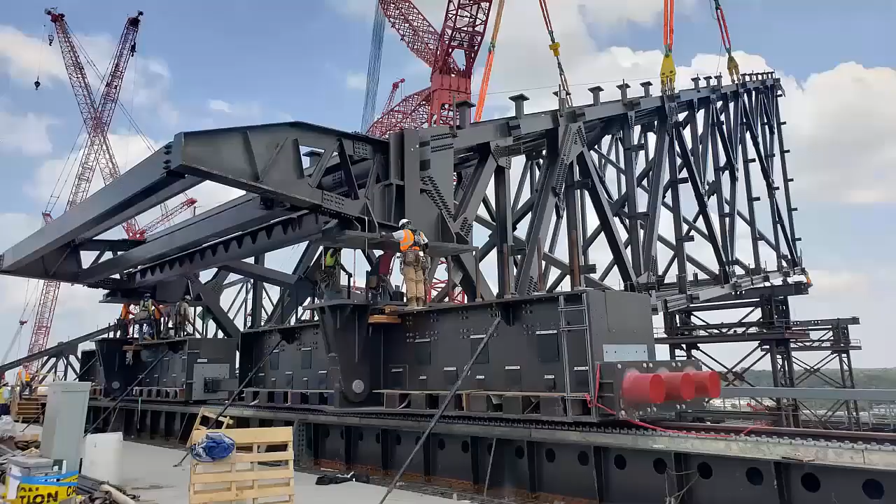So then you get one of these huge cranes, which I'm sure Manhattan will probably talk about a little bit as well. And then you lift up the operable roof boxes and place them on top of the mechanization platforms. This is on the north side, so unlike the fixed roofs, the operable roof was built from the north end, given the north end was the fixed side.

The other thing to note is that the shoring tower used on the west side was disassembled and moved slightly east to allow for these roof box trusses to be built on top of it. As they were being built, they would move them to the side and then use that same shoring tower to build the next segment. And little by little, as these box trusses were being assembled, they also had cranes building the planar trusses in between them until you had the full structure built.

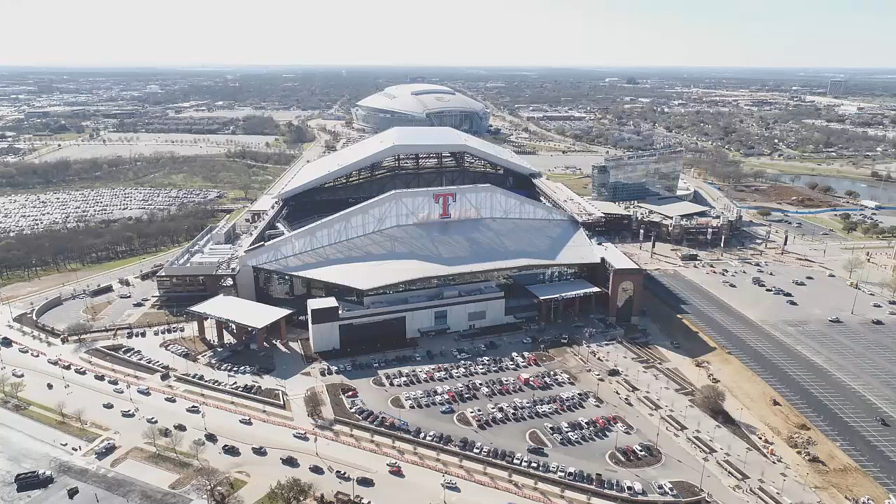The other interesting part is that this whole system really requires one person to operate it. He sits in his operation with a couple of spotters on the rail, making sure that everything is going smoothly.

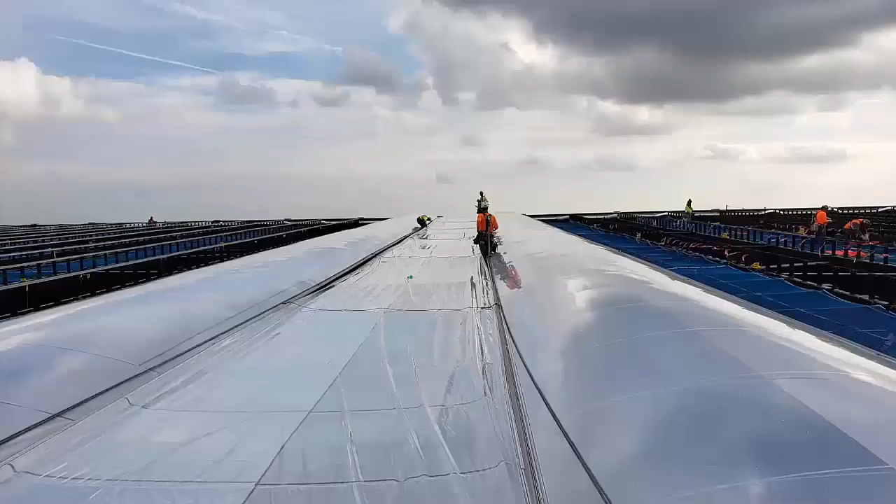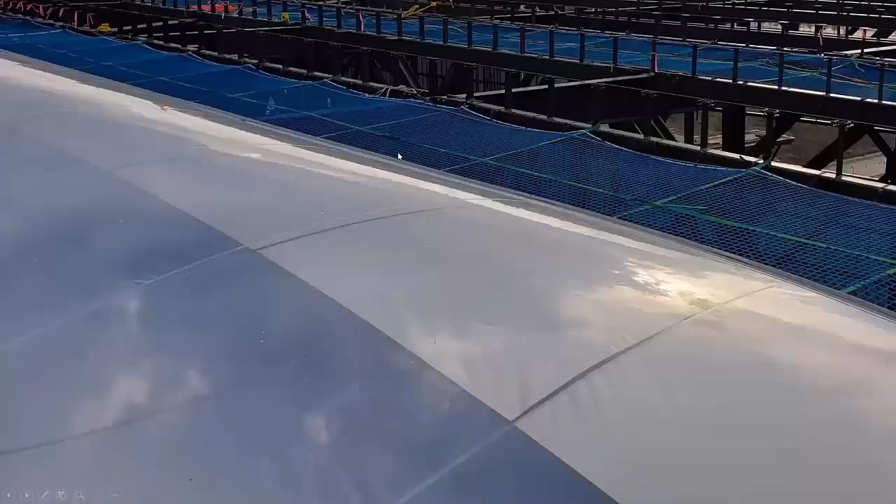Here's a picture on the top. You can see the ETFEs as they were being installed. And this is after they were filled with air. One cool thing about the ETFE, as you can see in this picture, is since they allow light, in order for the light to not bother the eye of the pitcher, there's these patches that are installed inside, one at the top and one at the bottom.

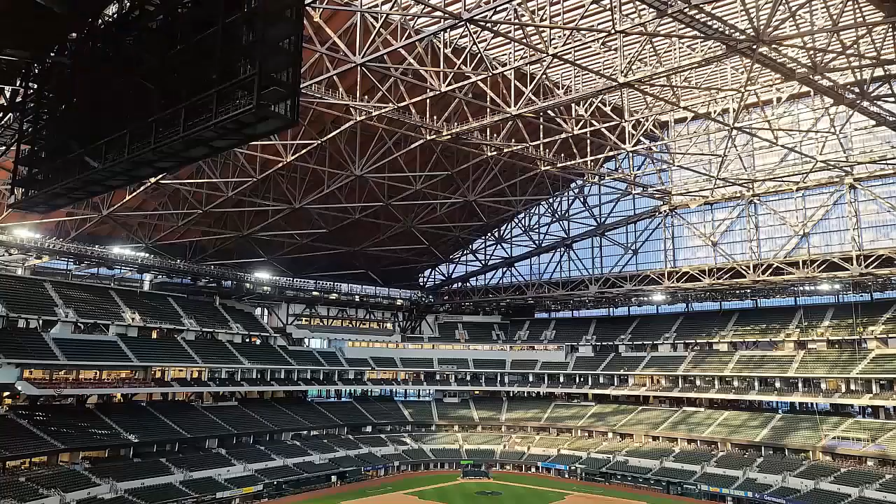And if you see from the bottom, you can kind of see that they're on one end on the top and then the other side at the bottom. It allows for the natural light to come in, but it prevents it from hitting the eyes of the players as they're playing. You can kind of get a better picture of it here, that you can see that the first base is kind of clear and there's shadow.

You can also see the gutter system and how it gets drained out on top of the rail and then down to the ground. And I was asked not to talk about the analysis much, so I'll skip most of these. Just know that there was a wind tunnel study that was done on the structure.

You can see on the left, these are the pressure taps. RWDI did the wind tunnel study. These pressure taps were essentially the things that they had in the mock-up system that they built, and then they measured each tap, and then we were able to map all those pressure taps to our structure and our analysis model and apply the wind loads directly to the structure.

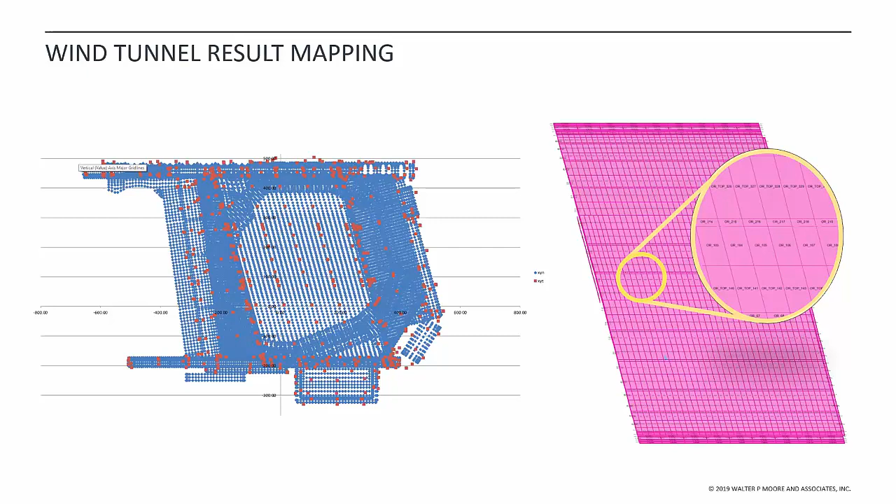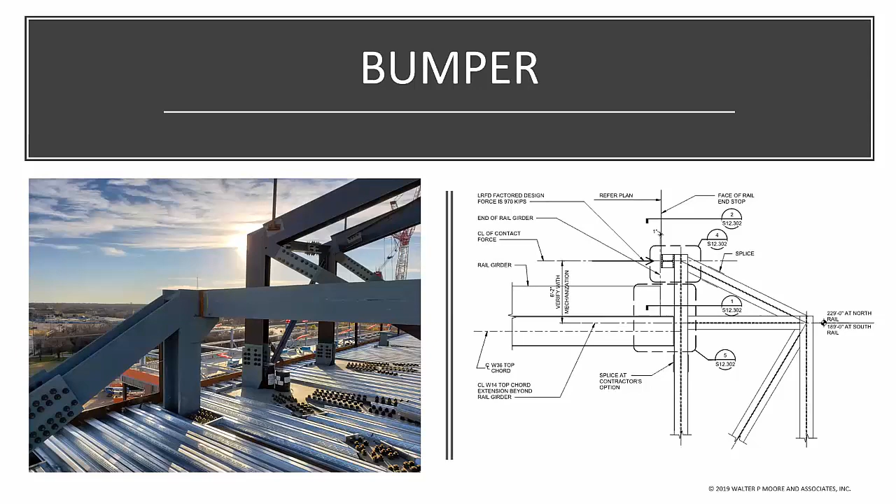RWDI studied the model in open, closed, and half position, and those were the conditions that were studied. Essentially, the roof could be parked at any location. One of the analysis things that we talked about was this whole bumper mechanism and also the e-stop mechanism that both acted like an earthquake, essentially, on the entire structure.

That added complexity. The 4-bar linkage obviously added complexity because you have different types of structure essentially sitting on your building, from the forces that the roof itself experiences as well as the forces that any supporting structure experiences. So we also had to analyze all of that. And then on top of that, like I mentioned, the roof could be parked at any of these conditions with the full load. And then there's the operating load as it moves.

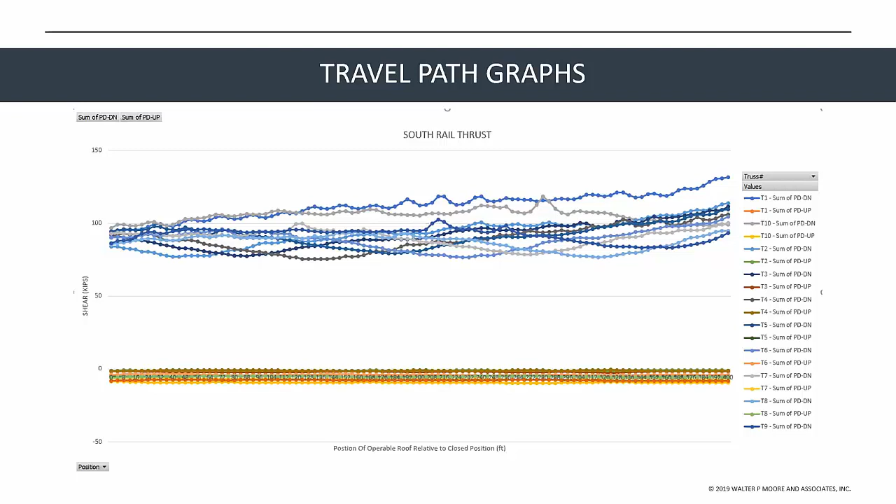So we had to essentially create these travel path graphs to understand the behavior of each one of the wheels, each one of the bogies, and also the different truss members that were experiencing the different loads. So we had all sorts of studies that were done with these graphs that would show what the structure is doing as a whole. And with that, I will conclude and we can take any questions.

Hey, Borhan. Thank you for presenting. Thank you, Jeff. This is a great presentation. Sure. I have a question.

So obviously on every type of project, you face issues; some things go perfect, some things just kind of don't quite go as you planned. On something this complex, I know you touched a little bit on how you all did the rebar modeling, but are there some lessons learned that you can share with us, either on the design or on the management, that maybe you would do a little bit differently if you were to do it again?

Yeah, sure. I can answer that question. As we get farther along the line, we always want to find new and better processes to help streamline the design process, and ultimately that provides multiple benefits down the road. And one is we want to continue to push the use of technology through parametric modeling, which is still relatively new in the structural engineering realm. And so that would include things like parametric modeling earlier of all elements.

We want to continue to remove those silos between the design and construction team and be able to work more closely with them through rebar modeling and erection engineering, through multiple other things that we can partner with them on. That really helps remove those silos and provide a more coherent product and work product between us. So I would say we pushed those forward on this project, but those are the items we would want to really try to continue to push forward.